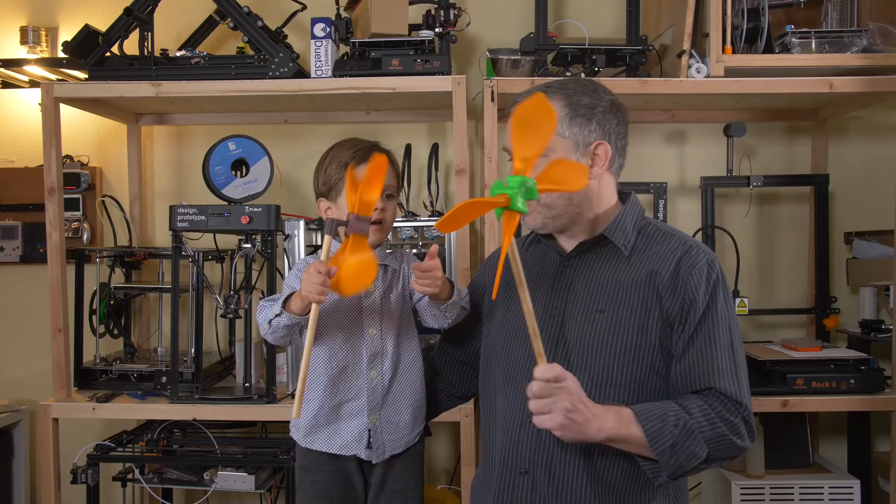And what do you think of it, Dax? I think it's good. You think it's good? Do you like that one, or do you like this one? I like this one. You like the green one, yeah. So this is the wife's. That one's yours, and then this is the best version of it that I've made. The color gradient change is just so clean. You see that, guys? So yeah, lots of lessons were learned making this project. I think it was about the most informative, instructive project.

Did you see that, Dada? I did this. Whoa! Hold down low here. And then here, I'll blow on it. Ready?

Watch when I do. Anyway, yeah, lots of lessons learned. I'm going to share them with you. Let's get into it.

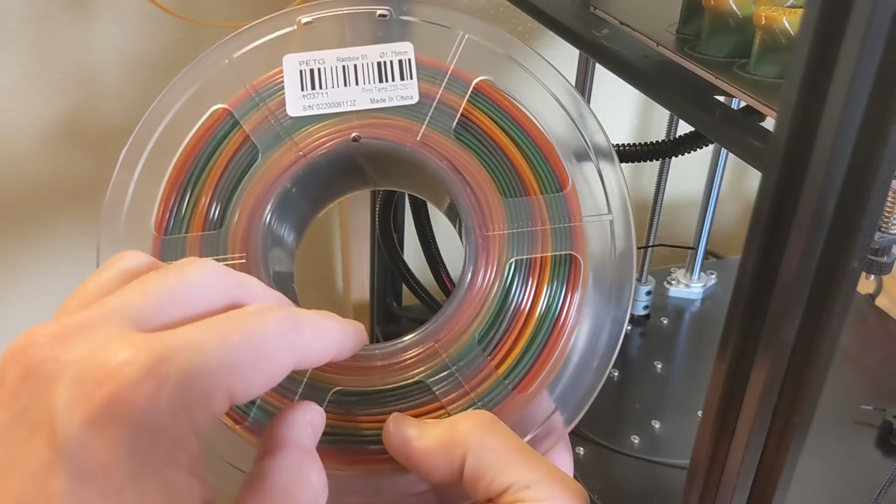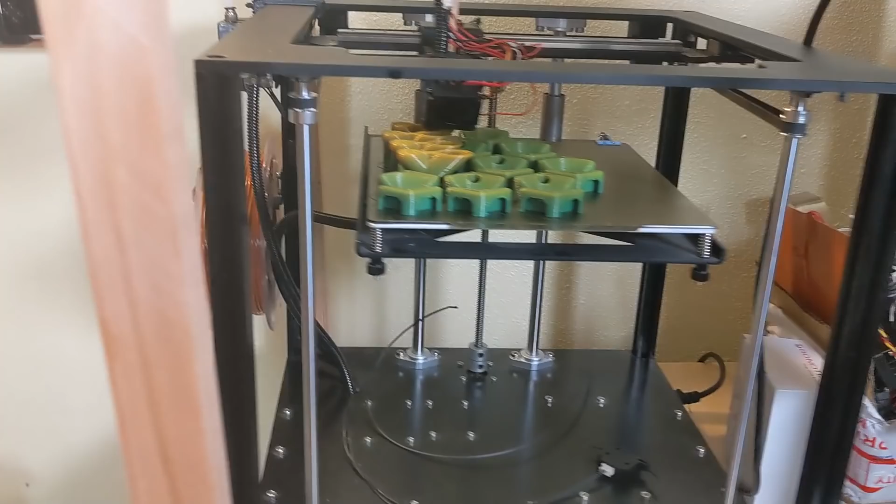I got this roll of color change rainbow PETG filament, and I've been waiting for the perfect project to use it with, and this turned out to be the perfect one. But you can see that the color change doesn't happen quickly. So I needed to print, actually this is just 4 of them, but I needed to print 4 copies of the project to get a good gradient change on the parts.

And I have no choice in the color. It's wherever the roll happens to be. So if I'm going to do another version of these, the hubs are going to start out as an orange color. That's just the way that goes. So lesson learned with this color change filament, it's kind of a hack. It can produce an interesting result, but it's really not very controllable, and you're at the mercy of the filament.

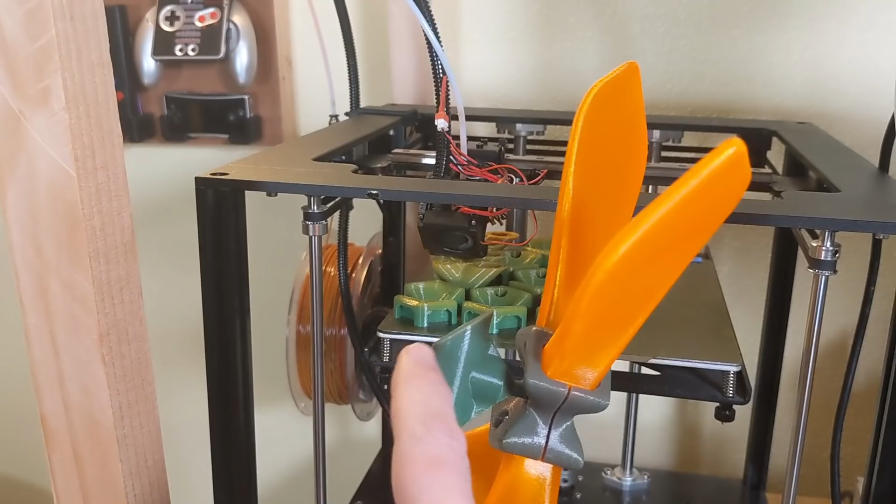See, look at this hub here. This was printed as a single hub, and you can hardly see the color change gradient happening at all. The green piece here, there were a couple of mistakes, so I burned through some more of the green filament, and it had changed color by the time I got there. So there's another lesson learned. The parts aren't going to match unless you print them like this. So if you're going to make a multi-part assembly with color change, you have to print it all in one go if you want the parts to look like they belong together.

But yeah, I'm having great results with that filament.

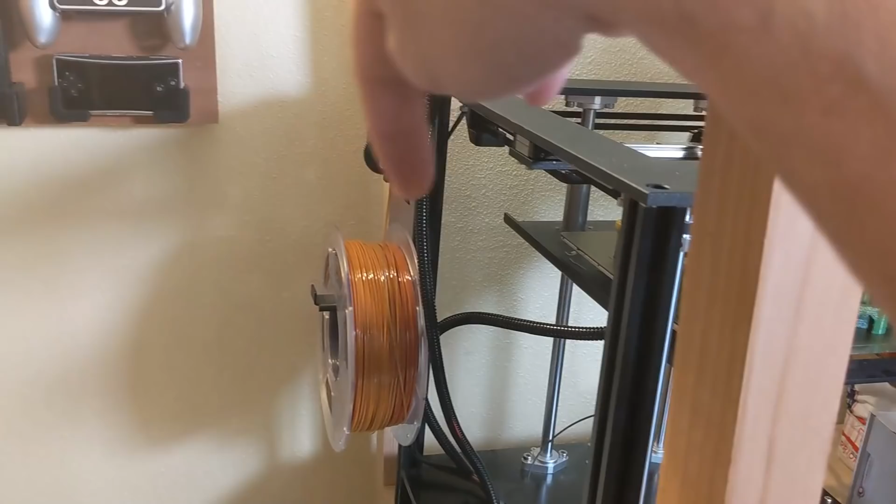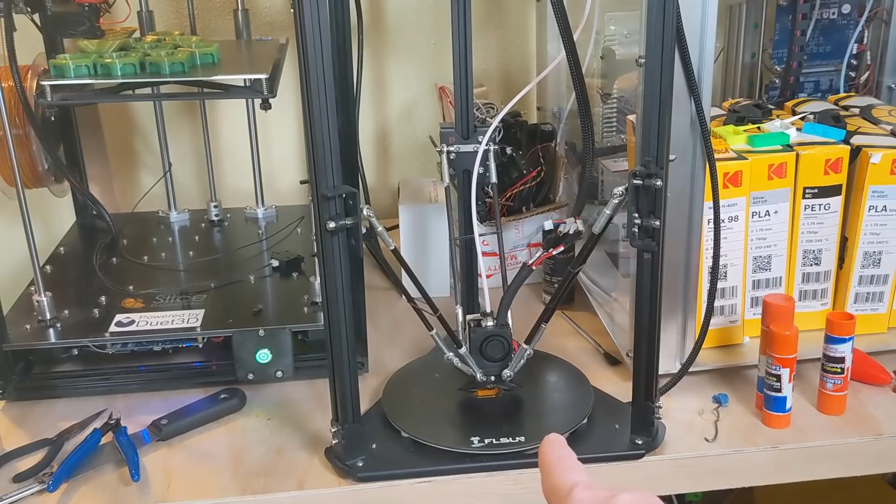As far as the blades go, the Delta printer here seemed like the absolute perfect printer for the job, because the bed doesn't move, and I didn't want inertia causing this thing to flex as it was printing. So the blade stays perfectly stationary, and it's just the head of the printer that moves around. Also, I've told you guys before, I'll say it again, Delta printers are not the most accurate for engineered components, which this is gonna slide into and engage with the hubs there.

It's okay though. It's very small, this part here, and like I've said, the closer to the center of the bed that you're printing, the more accurate your Delta printer is going to be. So this did turn out to be the perfect printer for this part, but it's got its problems. Delta printers are supposed to be fantastic for speed, and this one is a very fast printer. The problem is I can't use it at its full speed potential because I'm printing with PETG.

So with PETG, the filament itself dictates how fast you can print, and I'm finding 50 millimeters per second is about as fast as I want to go. That's real time, you guys, and that's as fast as I've been successfully able to make these parts on this Delta, which is capable of moving like 4 times this speed.

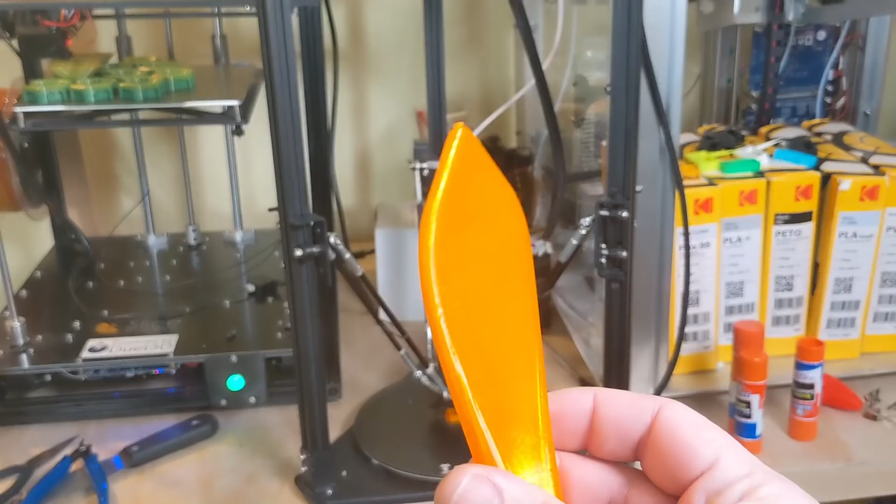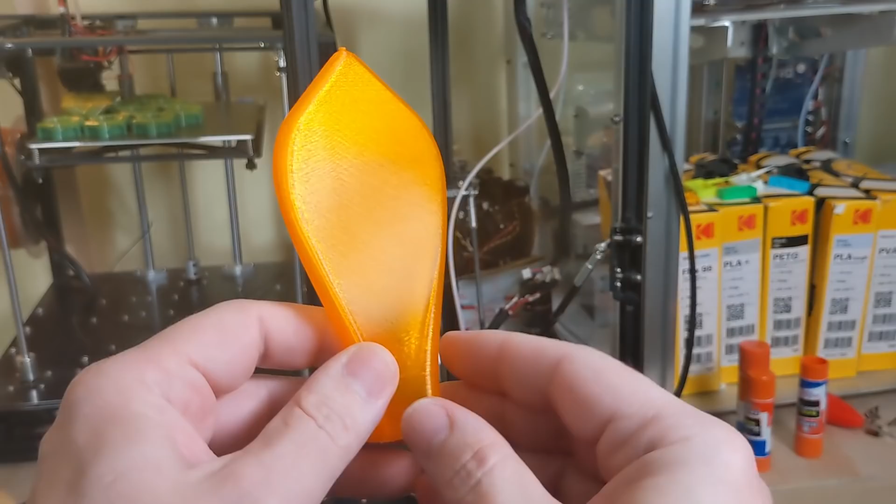I'm printing these with a single wall. That's a vase mode spiralized single wall, and it's got 120% extrusion, so that I'm getting really good mashing of those layers together, and it does make for very strong parts. If I squeeze it, it feels kind of like a Nike Air. It does have some microscopic pores, so if I squeeze that for a long time, it will leak down, but not really. Very, very minimal air leakage there.

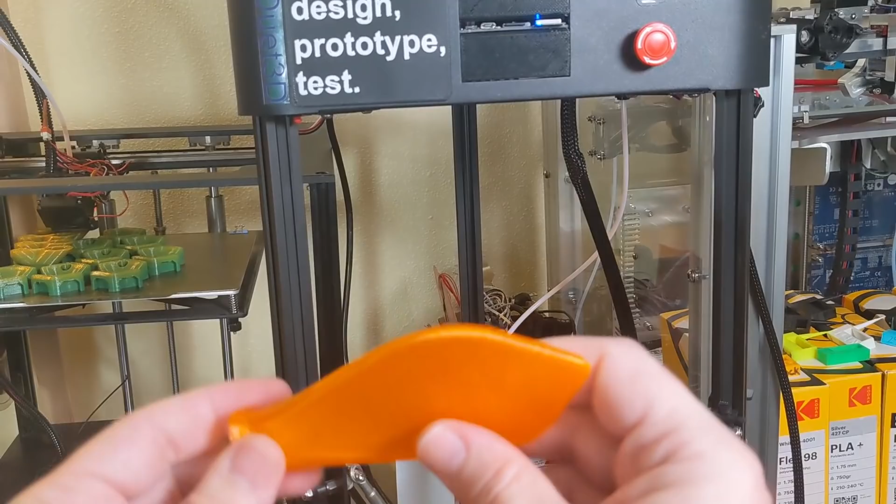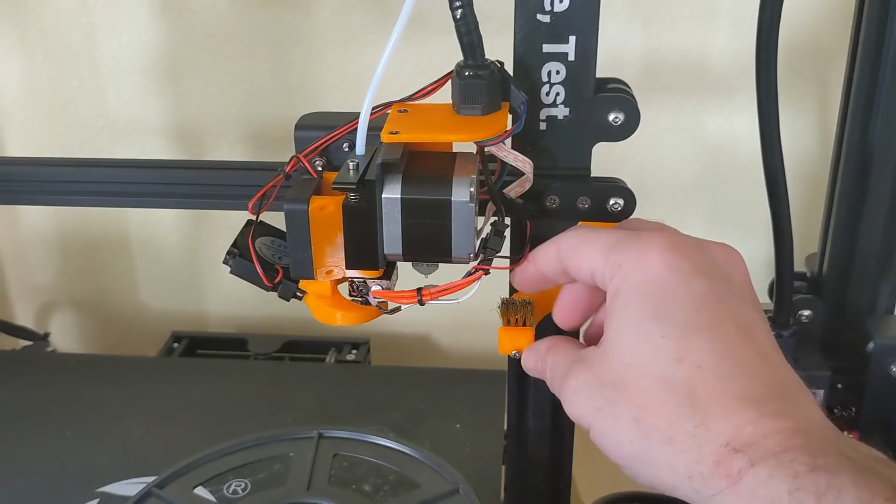So if I leave this outdoors, I'm less worried about ingress of moisture and bacteria and algae and whatnot growing inside of the wing. By the way, you guys remember a couple of videos ago when I was talking about this nozzle cleaning brush and the attempt to make one with silicone wiper blades.

Well, here I am doing this project with tons of retractions and gaps between the parts, and you can see zero stringing, absolutely no issues. So I don't always have that problem. The key, like I said, is to use dry filament. So you absolutely need to have a filament dryer to achieve results like this, unless you're opening a fresh, brand new filament.

But the thing is, these filament rolls can soak up moisture, even being stored at the Amazon warehouse or wherever they come from. If they made this thing 3 years ago and it's been sitting on a shelf, even the plastic bag with the desiccant in it doesn't prevent the moisture from getting into the filament. So you absolutely need a filament dryer if you want to have consistent results like this.

But I still recommend that brush. It's a nice safety feature. Unfortunately, I can't fit one of the brushes on this printer. There isn't the overrunning travel outside of this bed. And the same goes, of course, for my Delta printer here. That nozzle really can only make it onto the bed. So it'd be hard to implement a brush functionality.

Of course, it could be done. I could put something up high like here and, between every layer, the nozzle lifts way up, wipes, and goes back down into printing. But what a pain in the butt that would be.

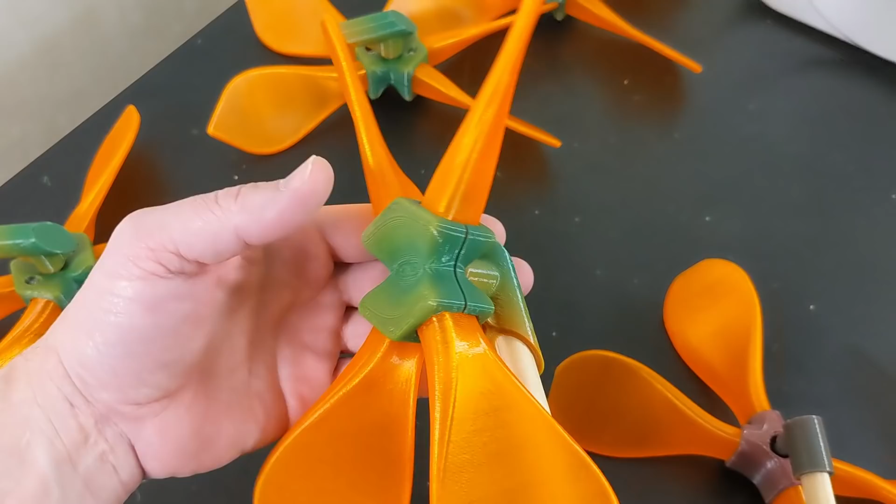So yeah, like I showed in the intro, the finished version is just so spectacular. It doesn't have that monolithic color to it, so it makes it seem more exotic and less cheap just because it's got that gradient color change. Yeah, it's just so cool. And the translucent wings, right? They certainly help with the aesthetics of it.

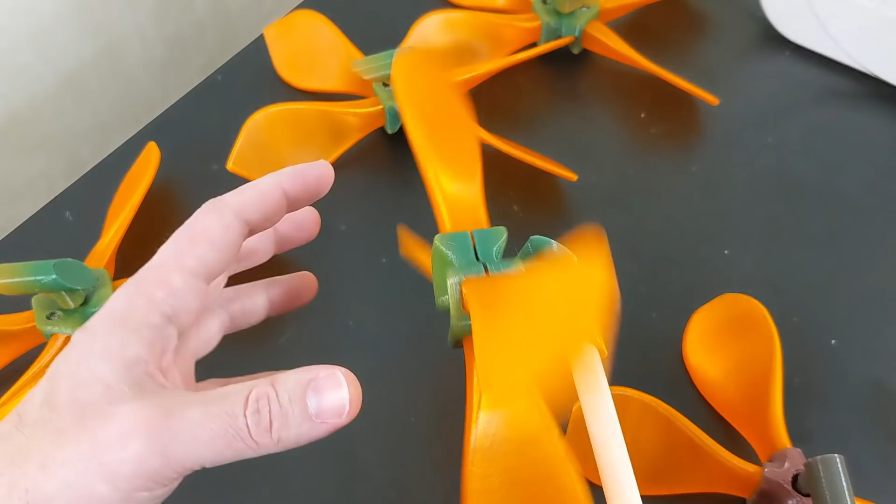I can't explain it. I was making this thing, and as I was designing it, I have full understanding over every single element that went into this, and yet the final result is just so cool. So yeah, this is the final version, and I made 4 copies of it to give to friends and family because you have a winner of a project when people that see it want it. They ask you for it.

So most of my projects just end up sitting here in my office with me, and people don't really see the value of them except for maybe some of you guys on my YouTube channel. But yeah, this is definitely a valuable thing. I love it. So let's talk about how this final product was reached.

I started off with this design. This is my first iteration, and literally every single thing about this is different from the final version except for one single surface. There's a semicircle here, and of course it's mirrored on the other side. And that semicircle was trimmed to make these pointy bits here, but there is a portion of that semicircle still intact, and that is the only similarity between these two designs.

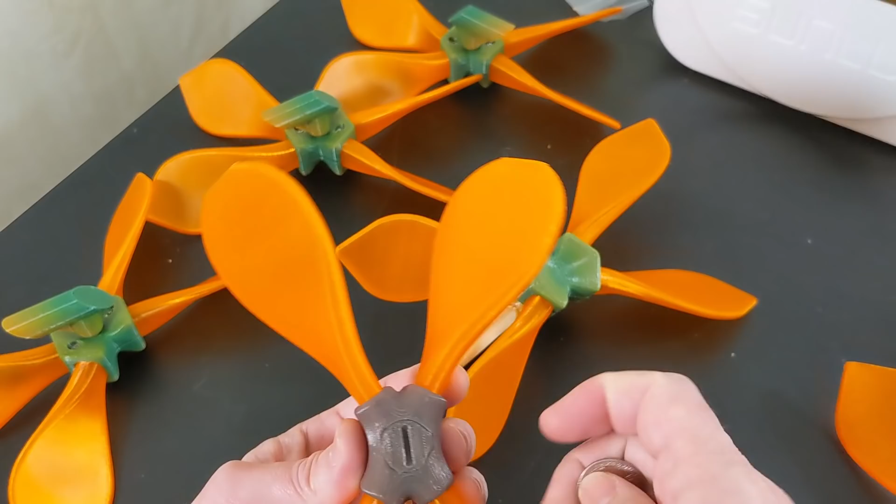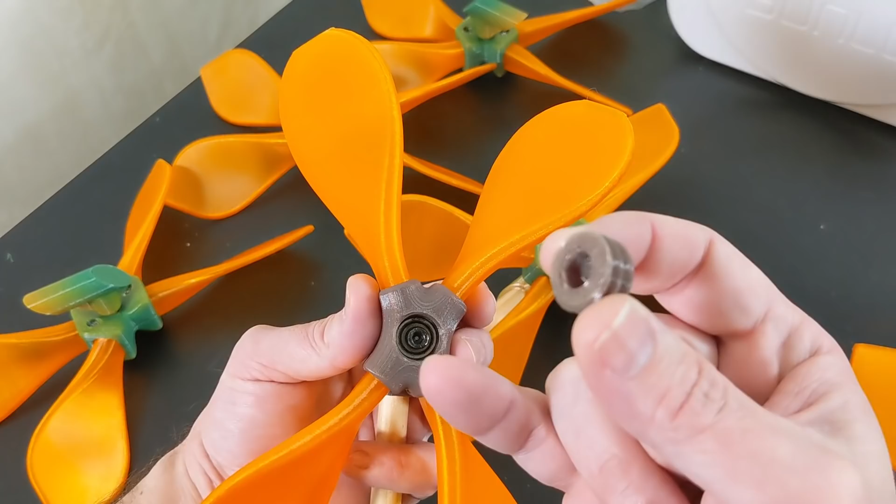So with this design, the idea was to retain the bearing using this plug at the front, and this was kind of fun to draw. I got to create some threads, offset them, and so the threading works, and you can see the bearing down in there. It's actually a press fit, so I suppose over time it could work its way out, and this just presses against the outer race of the bearing, and of course the bolt holds the inner race. And yeah, this works quite well.

Now, functional as this design is, it's pretty fiddly to get that. Oh, look, it went together just fine that time. But it can be really fiddly to get that plug threaded in there. Of course, I could alleviate that problem with a chamfer if I was going to continue with this design, but I didn't. There's lots of things that are not optimal.

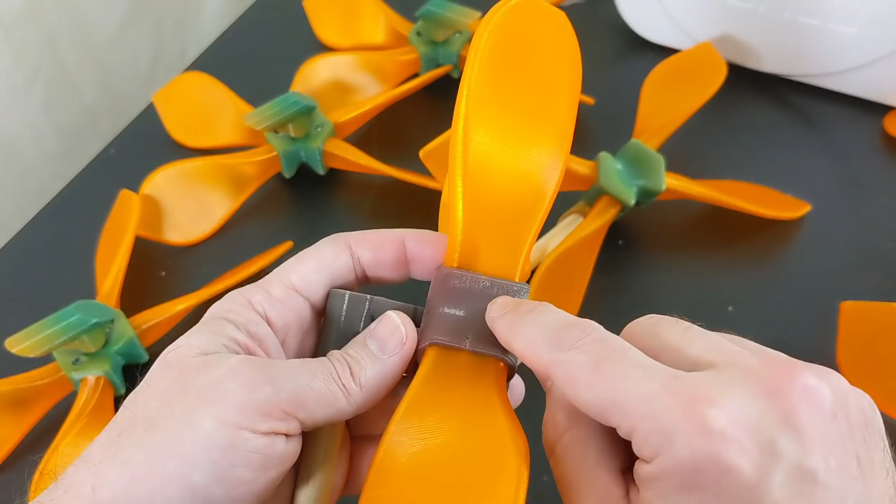The blades here are held in place with these pieces of filament. They're just pins, basically. And I melted them flush with a soldering iron, which also sort of cements them in place. The large flat cross section here was problematic for 2 reasons. First of all, this is kind of skinny and that's kind of wide.

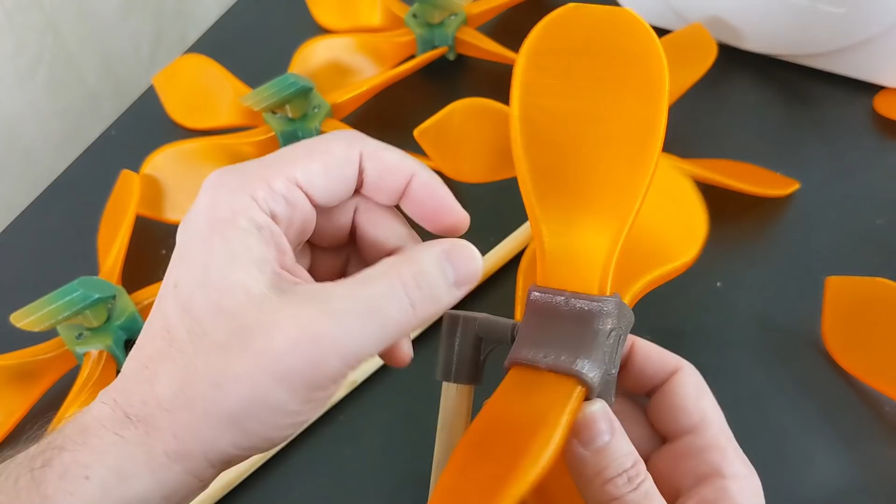So as I was printing, way up here, the slight drag forces of the nozzle printing across this blade was flexing the blade during the print, but only in this direction where there's a skinny cross section. And that's why the final design here has much wider profile in that direction and narrower in this direction.

Narrower also because this sort of paddle, this flap wheel, resisting the spinning forces is not ideal when this is being driven by the wind. So you have forces here which hit the 45 and cause it to spin, and then this is resisting it. So you're going to get a slower spin with this one than with this one. It's just the blade is more efficient here.

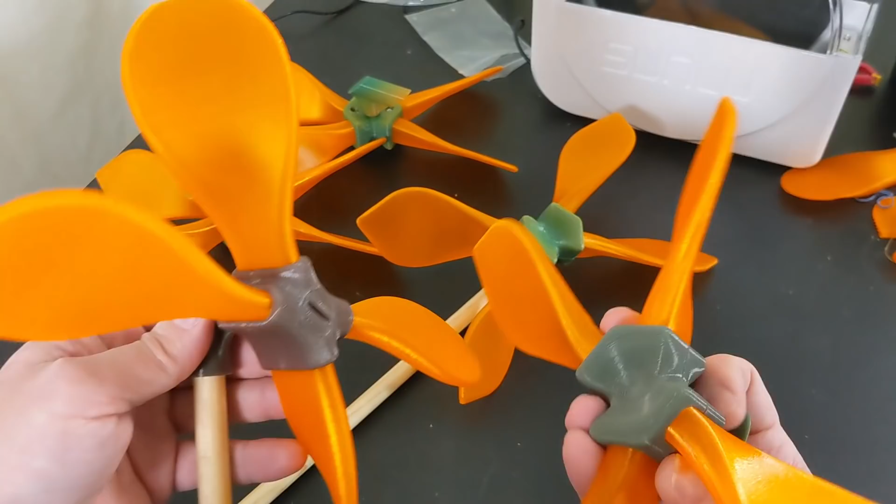Now, for printability, I had to make the top of this open. You can see that. The problem I was having is I couldn't get good, call it bridging. The ceiling on the inside was failing on me, and then there were lots of holes, gaps in the print.

And normally with a print that's not with this translucent material, what I would do is start some infill material, maybe around where my fingernail is here. And so you have like 2 or 3 layers of infill, and then that ceiling has a support network underneath it, which causes the outside of the print, by the time it gets to the outside layers, it's flawless and it looks gorgeous.

But with this, being able to see through it all the way, you'd be able to see those features, and it really kind of destroys the aesthetics of it. So the best technique I came to was to just leave it open for the rounded wing shape. But that's why I went with the pointed wing here, because this is the magical 45-degree angle, and you get flawless prints all the way to the tippy top.

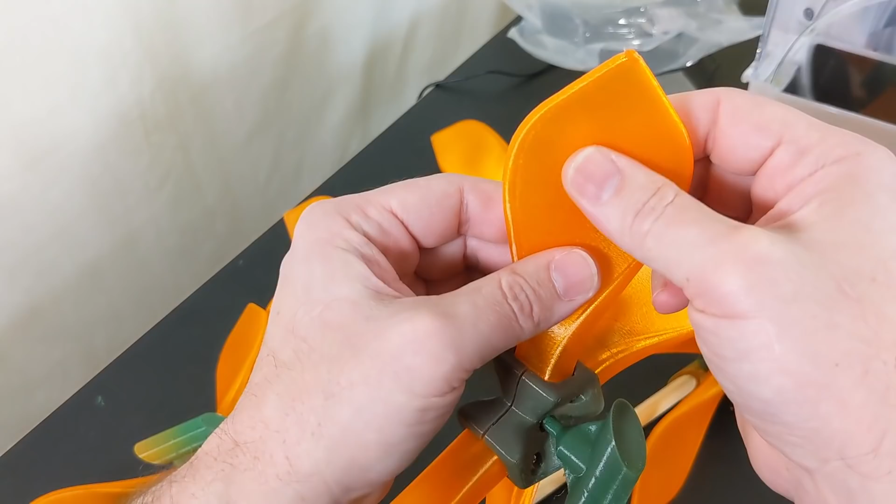So yeah, this makes an enclosed thing, and like I said, it's kind of pressurized. If I squeeze it, it feels like a balloon, like a pressurized thing, very much like a Nike Air. The microscopic holes are at the very tips, so even with this 45-degree, I still have the problems right there. So if I squeeze this and hold the pressure on it, it slowly deflates, and you can see the convexness to it. So that'll reinflate itself here in a minute or so.

Now this was the second iteration, and you can see some small changes between this one and this one. See how the top works there versus the top over here, and there were some other small tweaks, just dialing it in, getting the bearing mount correct, it was mostly this part that changed.

So iteration number 2 also figured out about the gradient change filament, how I needed to be extruding more filament, which means I needed to print multiple parts together in order to burn through the filament more quickly and get that gradient to work. But I don't generally like to do multiple parts on a single print, and the reason for that is that you have a higher likelihood of failure.

So you can have layer skips or that kind of a thing happen while you're shifting between parts, while there's a travel move in between them. And if you do have a failure and your print gets ruined, you've lost 4 parts instead of just 1.

So because I'm always prototyping and I never have a chance to really dial in my prints just for reliability and the highest quality, everything's always changing. It's always in flux. So the multiple parts nested together in a single print is ideal for a production environment, but usually not ideal for me. But in this case, obviously I had to do it to get the color change.

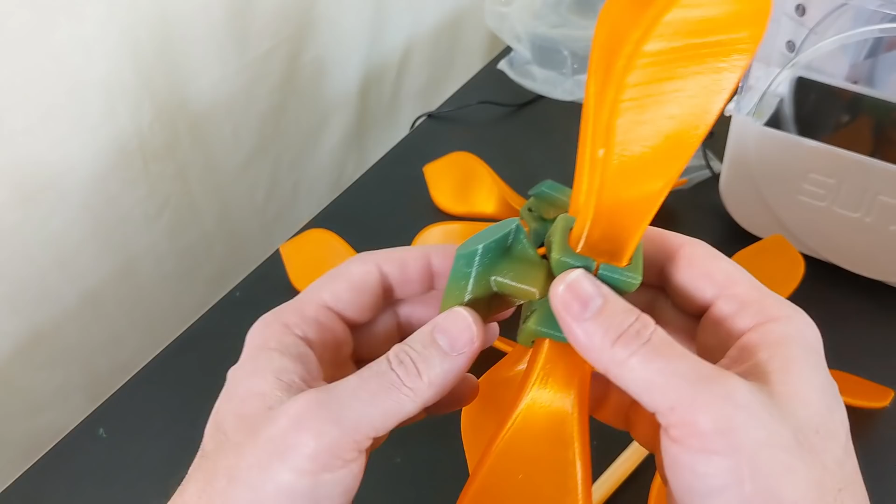The other way to do a color change would be with like a mixing nozzle, maybe even like a diamond hot end, but then you got to get really fancy with your slicer and your firmware in order to tell the green stepper motor to extrude more than the orange stepper motor. So if you had 2 filament colors going in and you would want to gradually change from green to orange, there would be sort of a dial effect, and that would be quite tricky to get to work, but it's definitely possible.

So if I was mass producing these things, that would absolutely be the problem to be solved there. So it's not the easiest thing to figure out how to mass produce these, but I was able to get a great result with that color change filament.

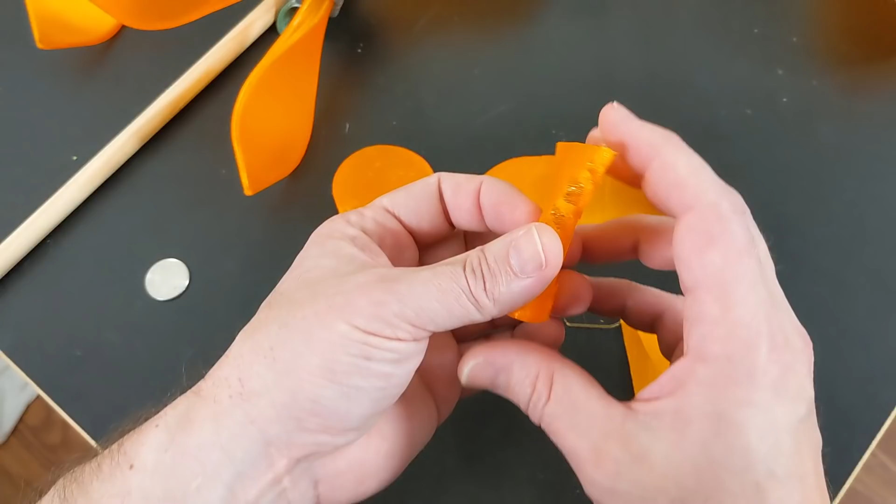Back to the challenges of printing these single wall blades. Let's look at some of these failed prints here because they're really instructive. This is what it looks like when I try to print too quickly. You can see it's doing okay around here, and then once it starts to kind of break loose, it's usually during a direction change, and you can see the filament basically doesn't have time to heat up the layer beneath it. So that doesn't get good bonding between the layers.

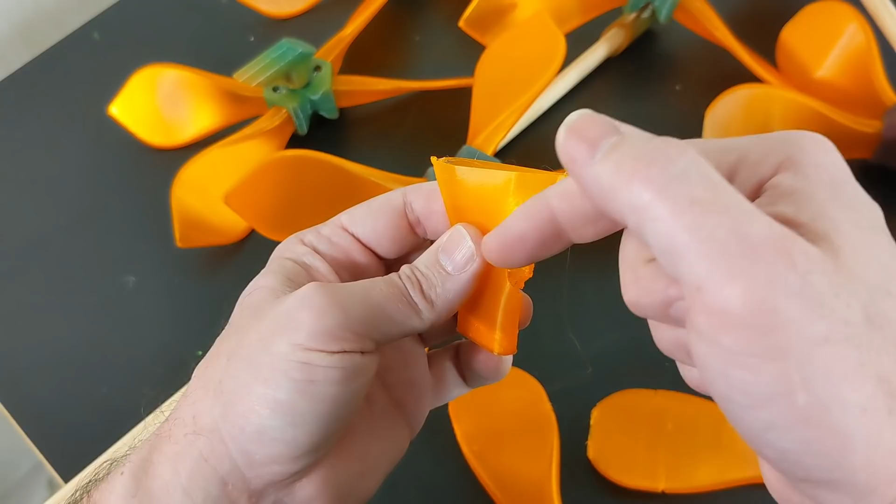And then when that molten filament tries to change directions quickly, the filament tries to shrink a little bit, find the straightest possible path. And because it's not fully bonded to the layer below it, this kind of crap happens where it breaks loose and you just stop getting good adhesion. So I had to slow down my print in order to avoid this. But even slowing down my print, I still had issues, more or less the same issue.

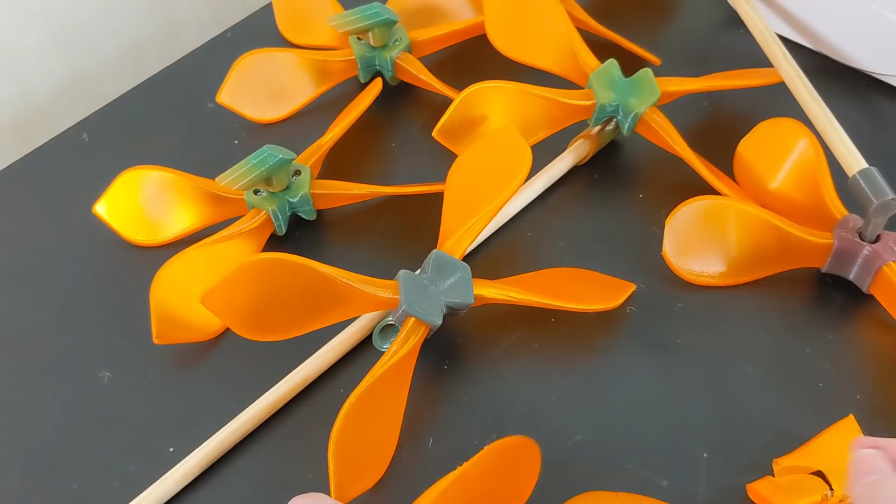You can see it here on this part where, yeah, you see it right there. So it's much smaller, but it's the same effect. And that was because you can see the radius decreased. So I tried to get a much thinner blade here. And with that narrow radius for that gap, I literally could not figure out a solution to get that clean print. So that's why I modified the geometry to look like this, where the radius never gets smaller than that. That was the smallest radius I could find that effectively worked.

So yeah, the design of this thing was a feedback loop. It was largely informed by the printability of it. So it wasn't just aesthetics that made this happen. It was: can it be made?

Now you can see that this issue is still persistent way up here. And what's happening is by the time I get to right there, these are basically married together. They're so close, they might as well be merged. And so if I can get to a point where it's just two walls thick and they're touching, then I don't have this issue. But there's always going to be that transition from this fat radius to this little skinny radius. And so I just abandoned this really thin blade technique. This is not the design that I went with for printability.

Here you can see more of that same issue, also on a very thin blade, and I think I slowed it down. I think this is a combination of bad geometry and trying to print too quickly. And this one shows the difficulty I was having with that through hole. Now these down here at the bottom, you can see they're darker, and that means that I've got a double wall for strength, just because that's getting gripped in the hub.

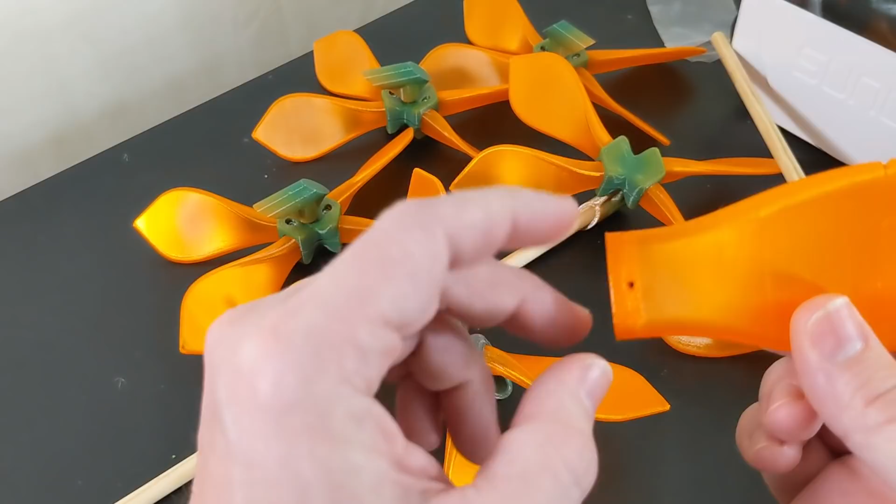And the same technique was used on these pointy wings. That's doubled up down there at the bottom. The single vase mode doesn't start until right there. So yeah, that through hole was more of a challenge, took longer to print. It was better to sort of dovetail the base of this one. And let's jump on the computer and I'll show you that dovetail in detail.

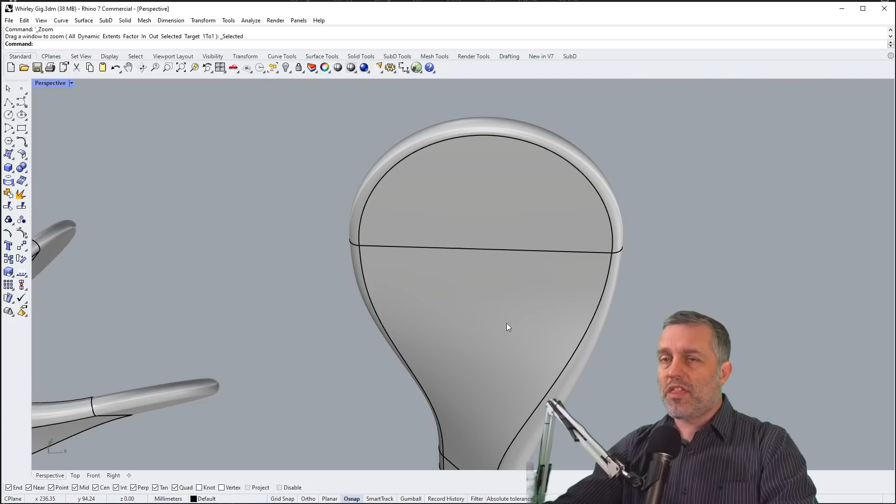Just to give you guys a quick glimpse into my design process, I started all of these iterations with the blade. So the very first blade design that I came up with was this. And usually your first design is not the best, but as I was working through it, this was what I came up with. And I do like it. It's very aesthetic and it's very simple. And, you know, as Mies van der Rohe said, less is more. So aesthetic simplicity really is appealing.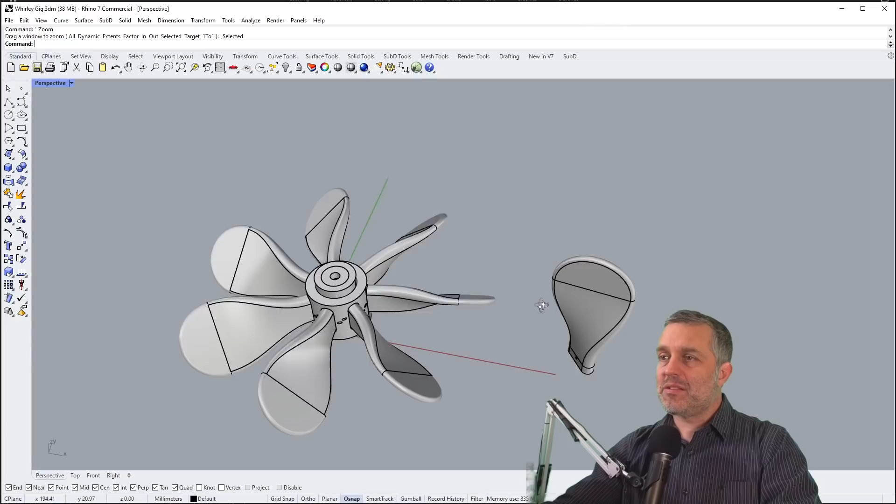Anyway, after I had that blade, what I did is I arrayed it 7 times around this hub. I was going to make a sort of cone over the top of this hub, kind of look like an airplane propeller hub. And I went with 7 blades because that's just the paradigm, right? Prime numbers of blades, 7, 11, 5. These blade numbers tend to, you don't get the periodization, right? Because they're prime. So finding multiples, you don't get those waves, those sound waves.

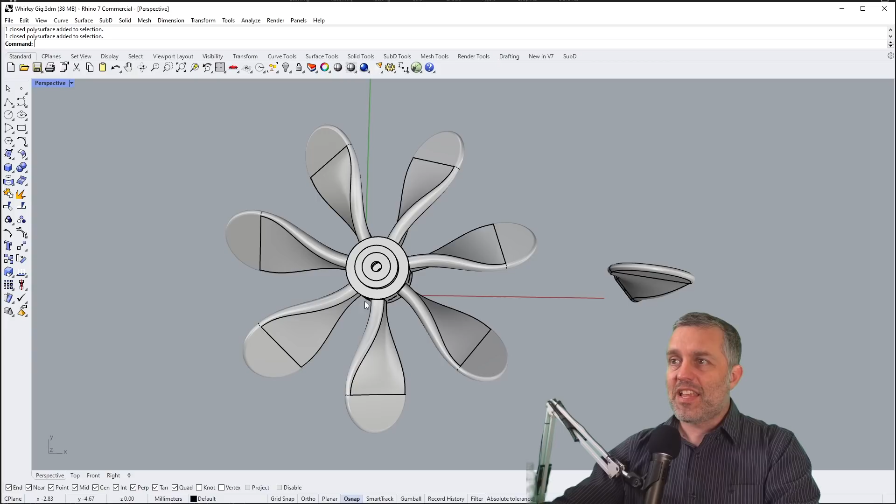So you want multiple blades to really eliminate the noise coming off of your fans. And this is a technique widely used in air conditioning fans or computer case fans, all this kind of thing. And so that was my starting point. I thought, you know, that's the way it's done. So that's the way I did it.

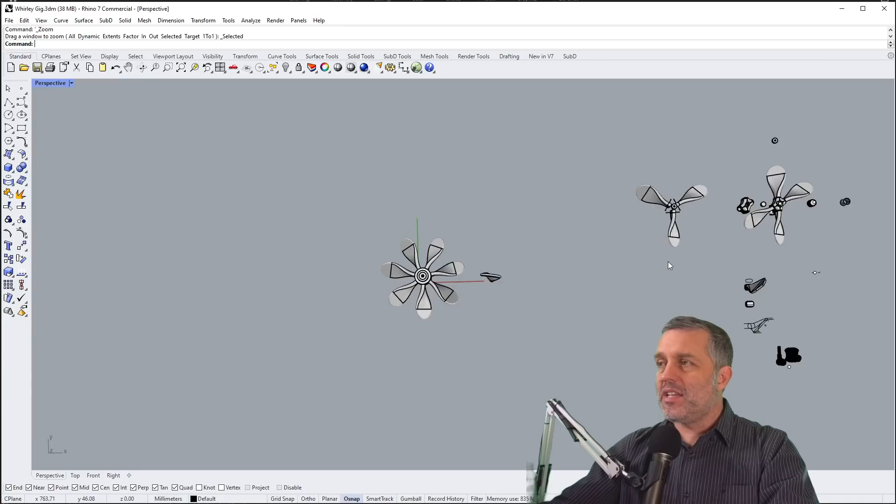But pretty quickly I realized that this is just really cluttered looking and it's a whole lot of printing. And I'd like to print these things more rapidly and I don't need all of those blades. So I decided to go with a 3-bladed design. Didn't really like that. And when I decided to try out a 4-blade design, I actually twisted the blades like this. And in fact, those are laid out 60 degrees apart from each other. So it's effectively a 6-sided blade that I've deleted 2 of the blades to make it a 4-bladed fan.

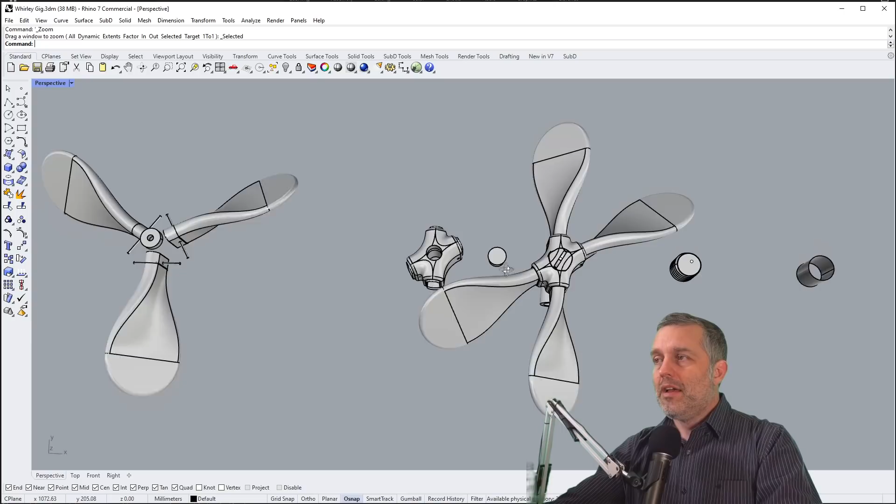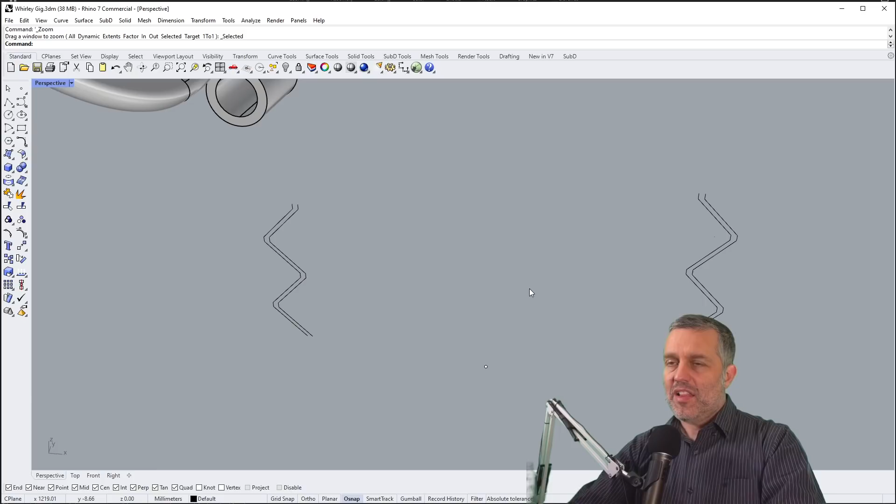The hub here. So you can see this was kind of the base hub. I didn't save all of the iterations, all the previous versions of it, just that. But then I made these threads and those were quite involved. You can see down here, this is the cross section to those threads. And there's a command called helix. And you can see it draws a spiral, which I can then sort of flow those cross-section curves along that spiral once I've drawn that.

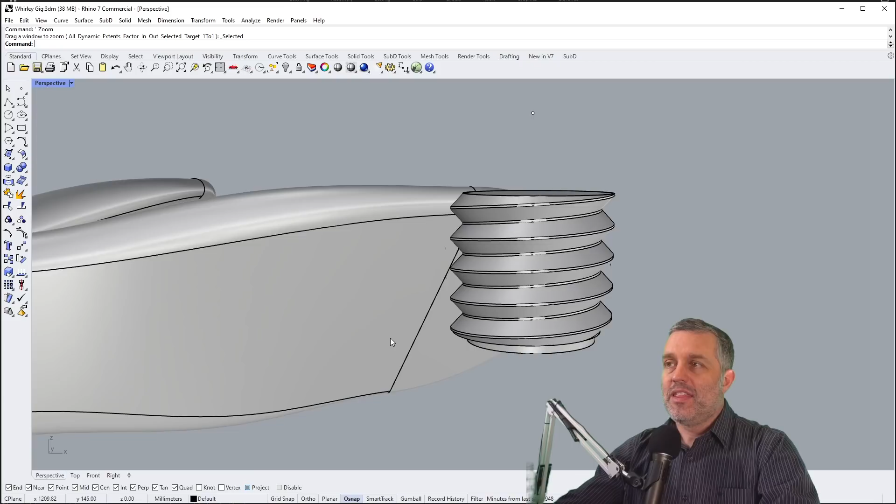So it's a very manual and sort of cognitively intense way of drawing threads. But if you want custom threads where every bit of it is custom or chunky, that's the way to do it. I think a thread wizard would tend to make like standard thread pitches that you would see in nuts and bolts and whatnot. So sometimes I've made threads that are semicircles. So there's all kinds of neat things that you can do when you can really make your own thread pitches.

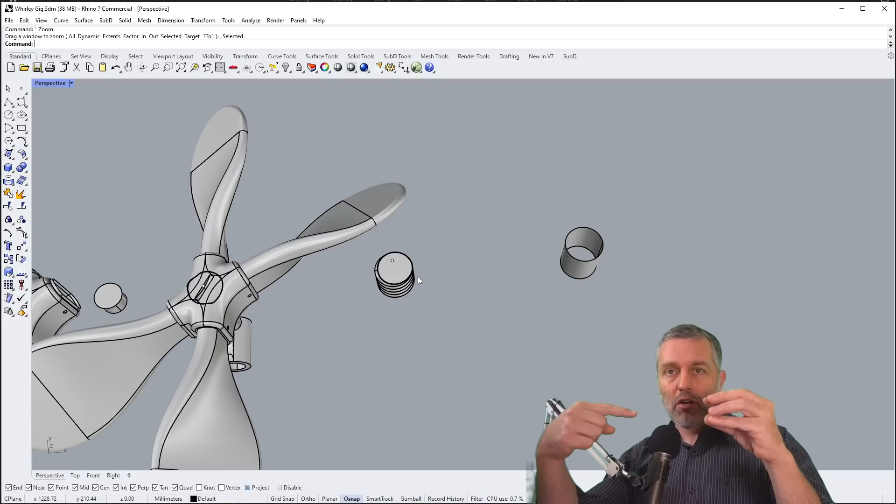There was a project with my Shaper Origin where the vacuum cleaner hose is actually a spiral hose. It's a flexible hose. And I was able to match that spiral ribbing and thread a piece onto it. So yeah, being able to draw custom threads is a good skill to have.

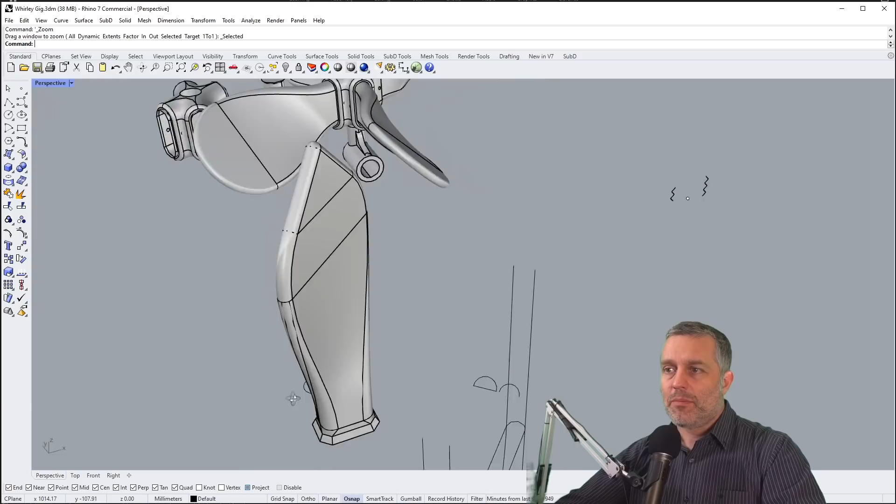Okay, so the next thing was to make this blade here. And this is the blade that we were talking about, in the physical version of it a minute ago. You can see what I've got is this mushrooming out at the bottom, this dovetailed shape. It's this shape right here. And that is constrained on all sides by a corresponding cavity for the fan blade to sit inside of. So I didn't need the through pin. I can just attach the hub around it, and it's not going to go anywhere.

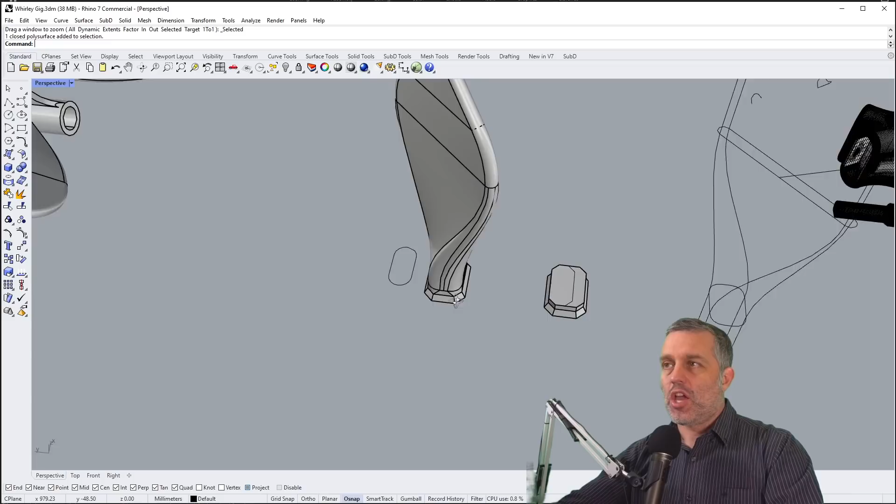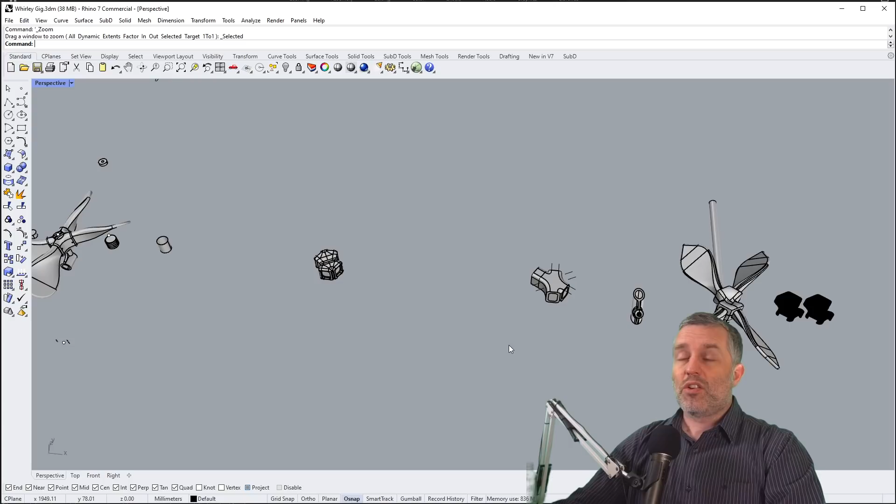So again, starting this whole design off with the blade design, and then moving on from there. This is where I went to next. Very simple, basic hub design. Anybody can come up with this geometry here in almost any CAD program, but Rhino, which is the program that I use, is actually incredibly capable of surfacing. Here we can see this thing that I made, and this is a cluster, man. This is terrible.

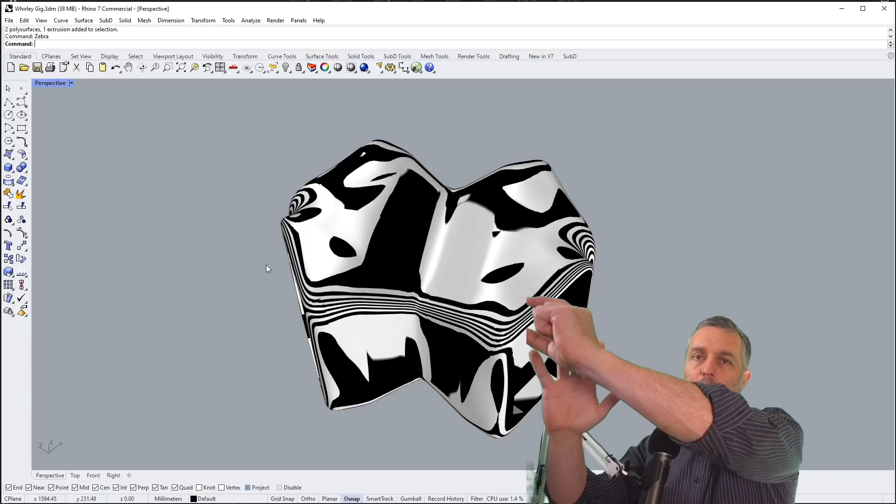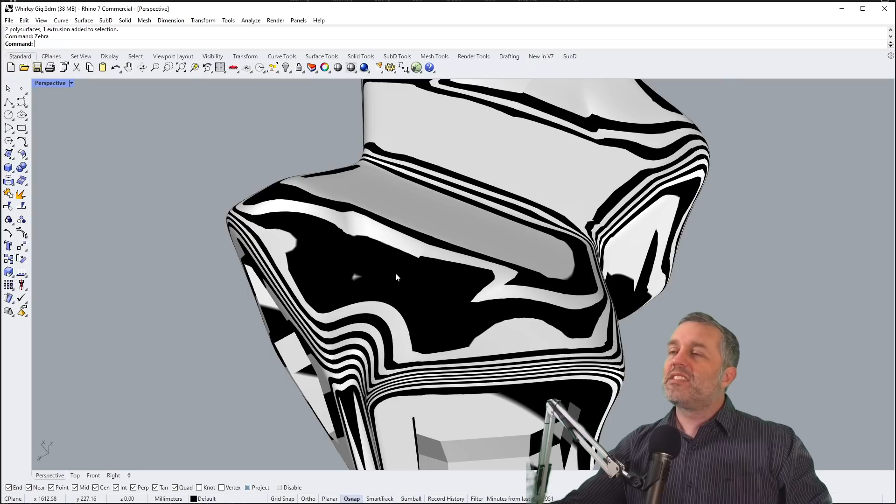But let me just run a zebra command on this. And what you can see is this is basically turning into sort of a reflective chrome object, like if you had a piece of cardboard here with black and white lines, like zebra stripes on it, and you were reflecting the zebras off of this chrome object. That's what you get here. And you can see, right there in the middle between the two halves, there's kind of a crease. You see how there's kind of a sharp point there? That jaggedness to it. That's a crease. It's not a tangent continuous seam between those two surfaces. So that would be a surface that I have to work on.

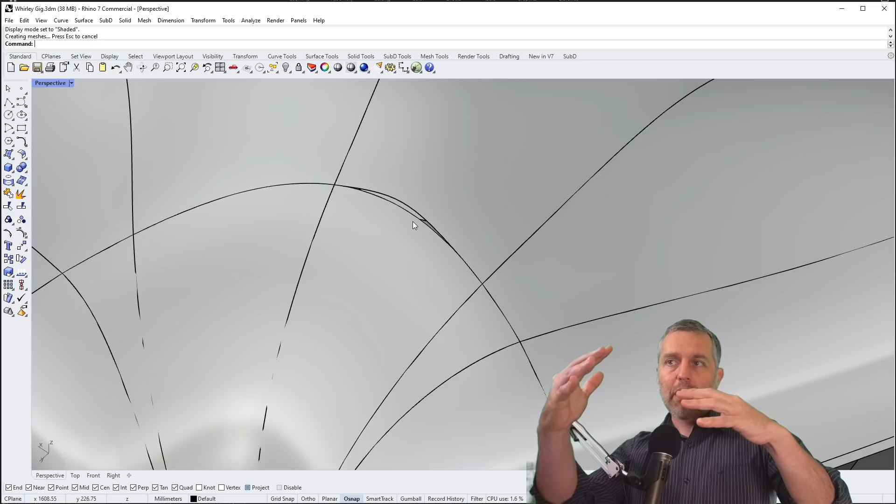So I can do what's called match surface. And you can see that that zigzag has gone away. Unfortunately, now we got this new problem happening here. We have a gap because as I matched those surfaces, in order for the program to pull those surfaces into being tangent to one another, it affected the other edge. So it is quite a battle, and being expert at surfacing is an employable skill. So if you can get your Rhino skills to this level, there are jobs for you for sure.

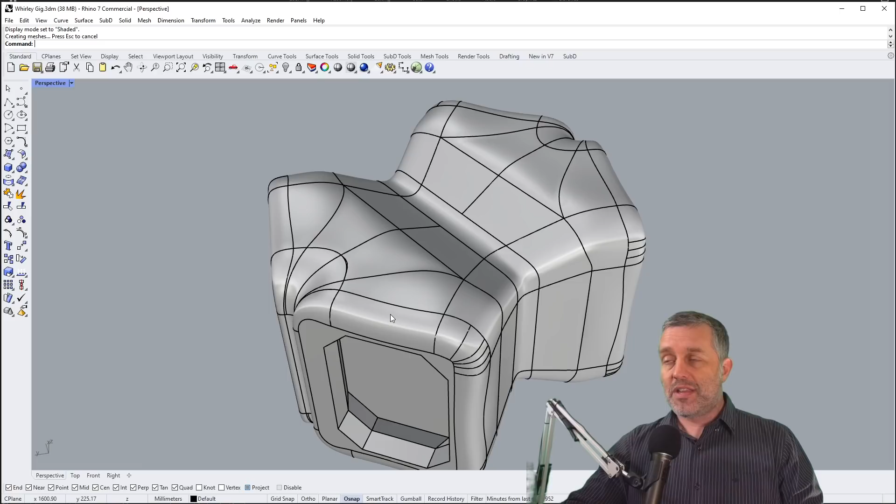It's intense. With a rendered view, we can see just kind of what it's going to look like. We can see that little crease right there at the top, and we can see all these dimples in funny places. And yeah, it's tangent, and the shininess of it doesn't look too bad. It looks okay, but no, it's not good. So I pretty much made this version out of stubbornness.

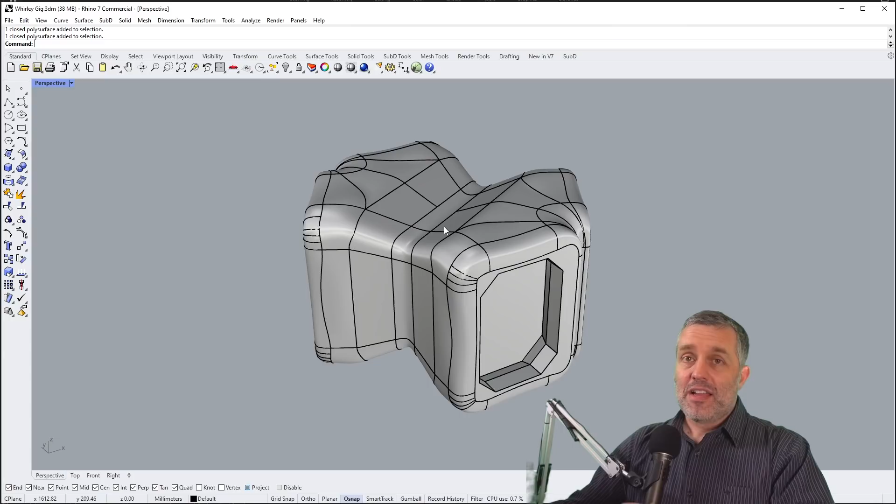It's been more than a year since, in a professional capacity, I needed to do some surfacing work, and I really just wanted to brush up on my skills and remember a lot of the commands that I just hardly ever use. Thankfully, I now have Rhino 7. That's what you see here, Rhino 7. And Rhino 7 comes with an amazing functionality, and that is called Subdivision Surface Modeling.

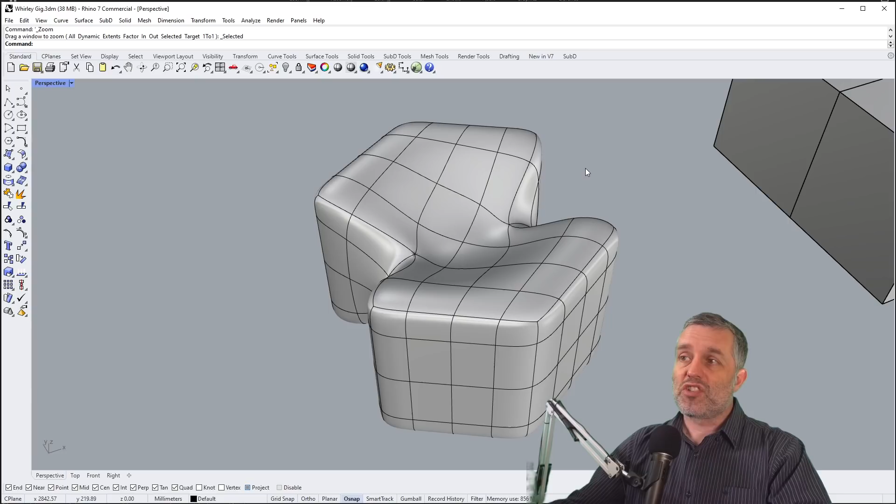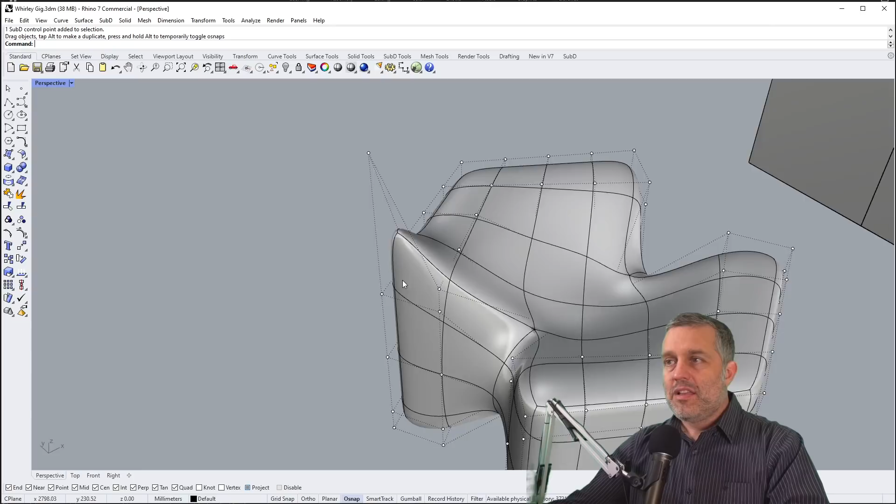And Sub-D meshes are amazing. So look at this very beautiful version. If you've ever used Blender, you will find this to be familiar. But watch this. I can basically come in here, and let's just grab this corner, just for the heck of it, and then I'll lift it straight up into the air. So I can just sort of morph it and blend it in any way that I see fit.

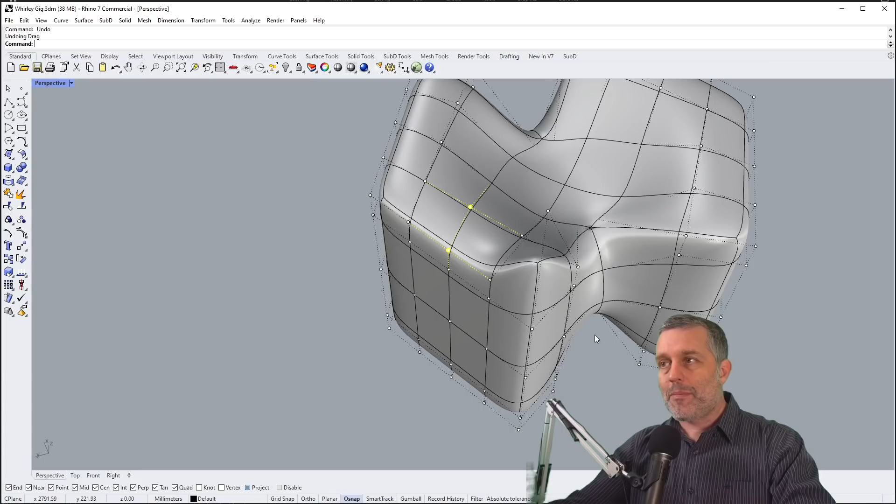And I can do it symmetrically, or I can do individual. That's going to be too far. That's going to lead to problems. But it's going to be tangent smooth. There are no creases. It's perfectly blended everywhere. Of course, this type of modeling also has its drawbacks, and there's a place and a time for surfacing work in Rhino, and then there's a place to use the sub-D modeling.

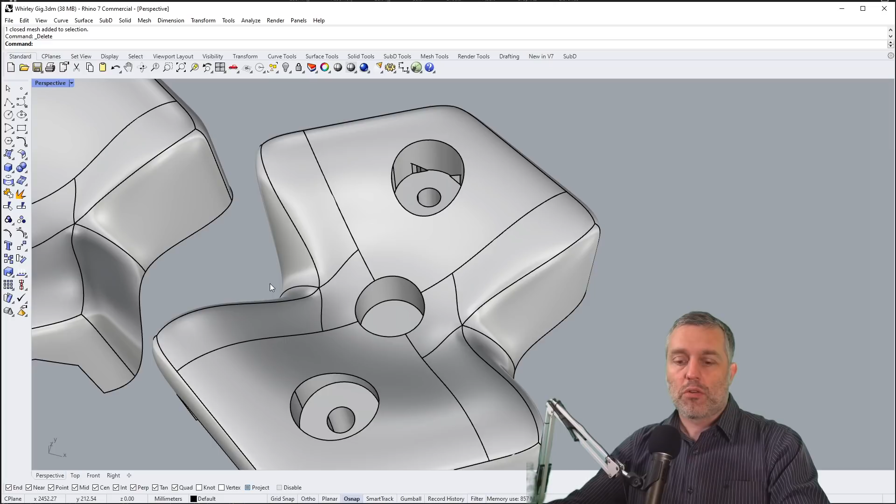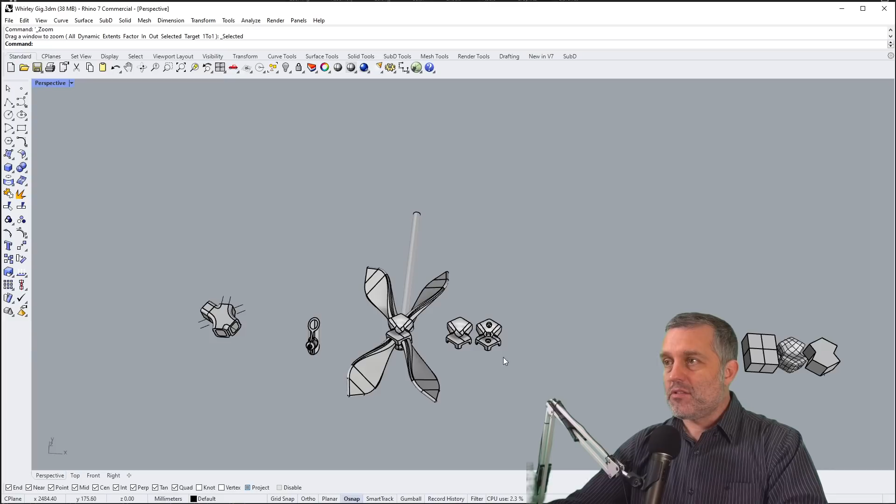After you're done with sub-D modeling, you can basically export the sub-D into a NURBS, which is the general Rhino surfacing. So it converts between the two. So now we're back to NURBS, which allows me to do all of the angular engineered surfaces that I would normally do to get things to work. So there you go. That is the final product right there. So it started out sub-D, and then I basically put all of the engineered facets into it, such as the holes and the blade retaining cutouts, the dovetail cutouts.

Now I want to make a point about CAD software, because everything I've showed you guys is kind of an interesting curiosity for the vast majority of you, because most of you are using Fusion 360, and you guys got started with Fusion 360 because it's free, right? Or it was free. Autodesk will charge you in the end. That's what they do, right?

Did you guys know that the first versions of AutoCAD that were free were the pirated versions, right? On Napster even. And they didn't offer free student licenses or anything like that. Their free version was literally the pirated version, and it was released by AutoCAD. This has been revealed. AutoCAD themselves put their pirated copy out there, and they hook you, they get you. And once you're hooked on their software, they start charging you more and more.

So they're going to keep on ratcheting up that price for Fusion 360, but you will have spent thousands of hours of your life getting good at Fusion 360, and you will be reluctant to change softwares. Or you'll watch some YouTuber talking about an alternative CAD platform, and you will just decide that you hate his CAD platform and you love yours just because you're good at it, right? It takes so many hours to get good at these softwares that it's understandable. The cognitive burden to learn a new software is quite high.

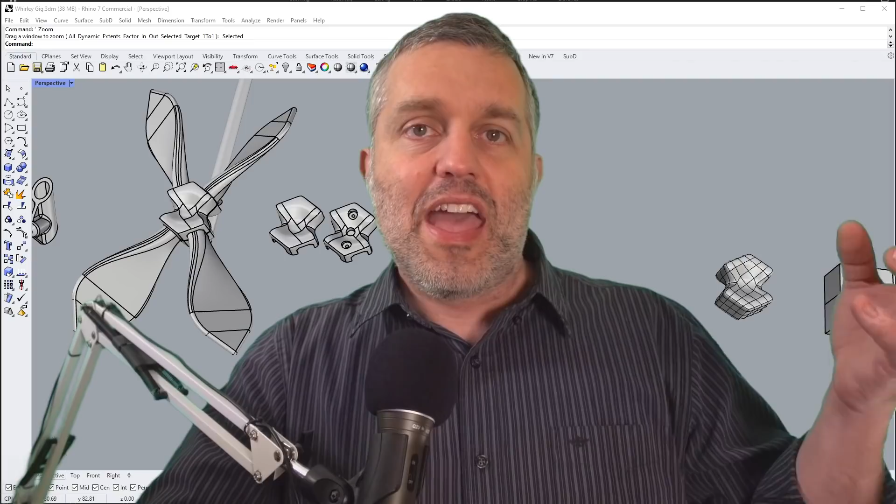You can go down the rabbit hole as deep as you want to make Rhino parameter driven, but this parametric functionality is just sort of a sales tactic of these engineering CAD platforms. So if you are a professional engineer who's going to be working with other professional engineers, or doing things like bending the metal on a brake, and you need to use the press brake calculating plugin, so all you have to do is draw the geometry and the engineering program automatically generates the cut file with the offsets for the bends, then these professional engineering CAD platforms are ideal.

Those are ideal. But for the vast majority of people who are seeing my videos, you, like me, are a designer or a singular engineer. And in my experience, you would be far better off using Rhino.

I absolutely love this CAD platform, and it's very popular in architecture programs, which is obviously why I learned it. I've got a master's degree in architecture, right? So that's where I was exposed to this software and really fell in love with it. But on the internet, you don't see a whole lot of presence for this software package. And that's kind of a tragedy, because I do think that most of you would be better served to be learning Rhino than Fusion 360.

Of course, you have to pay for Rhino, so that's another subject. It's reasonably priced, but I'm not going to talk about that now. Anyway, you can see just how much phenomenal functionality there is in this CAD software. And here's a look at the two fan designs in Rhino.

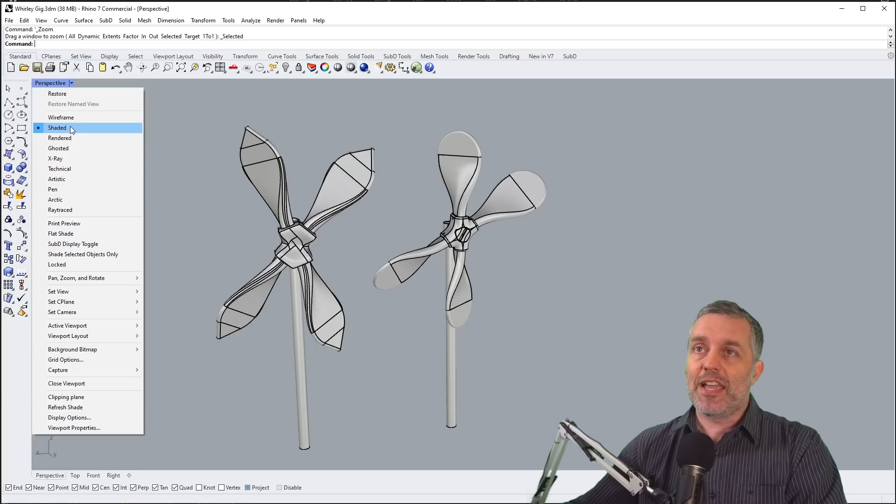We've already seen them in reality, but I can do a rendered view, which is just kind of a quick and dirty way to get an idea of what they're going to look like, or I can do a ray traced rendered view here. Well, if you're into gaming, you know about ray tracing, and it's resource intensive on your computer, but it makes phenomenal results. And this was just a quick material application.

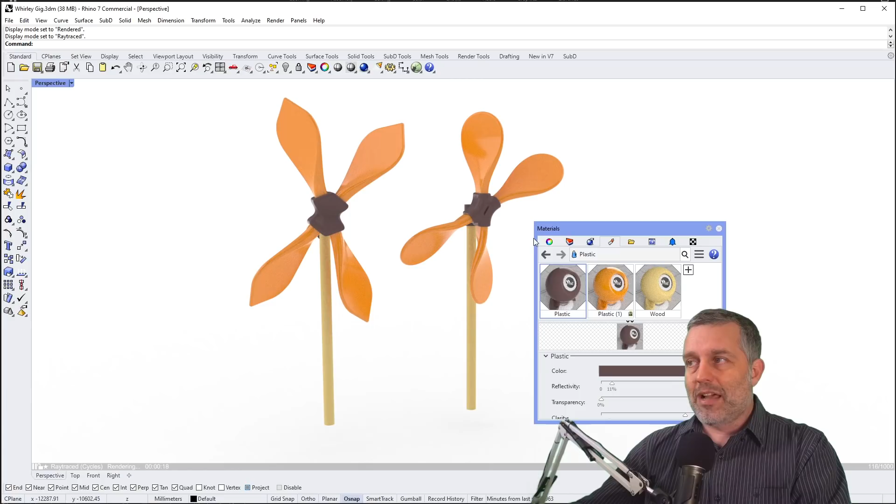I spent all of 2 minutes assigning a couple of materials to this. You can see my materials library right there. So all built into Rhino, really nice. And it gives me a great idea of what the final product is going to look like. So I love this CAD platform. I have 3D printed a lot of things, a lot of different designs. And this one is the most impressive.

It's functional art. So much of the time you guys see me making parts for 3D printers, which are more towards the engineering side of things. They're going to be shaped the way that they are to serve a function. And I definitely lean towards the function side in the function versus form debate. But in this case, it's fully functional. I guess the function is pretty basic. It just has to spin when the wind hits it. But the form is just so gorgeous because of that color change gradient filament.

So if I was running a 3D printer farm and I was trying to sell objects, I think this would be a really good candidate for the product that I would try to launch. Now, given my experience in manufacturing, I have a patent on the buckle and all that, and I still have inventory for those bags, and it's hard to get those to move, especially now during the pandemic when nobody can travel, because they are a travel bag.

But it's been my experience that, at least for my skill set, the hard part is not making it or getting it made or even coming in at a certain dollar. All of those things seem to be challenges. The problem is always sales. Getting eyeballs on your product and getting people to buy it is the challenge. So yeah, I know how to make this. It's awesome looking. I do think that there is an appeal to it, but getting it out there would be hard. So what are you going to do?